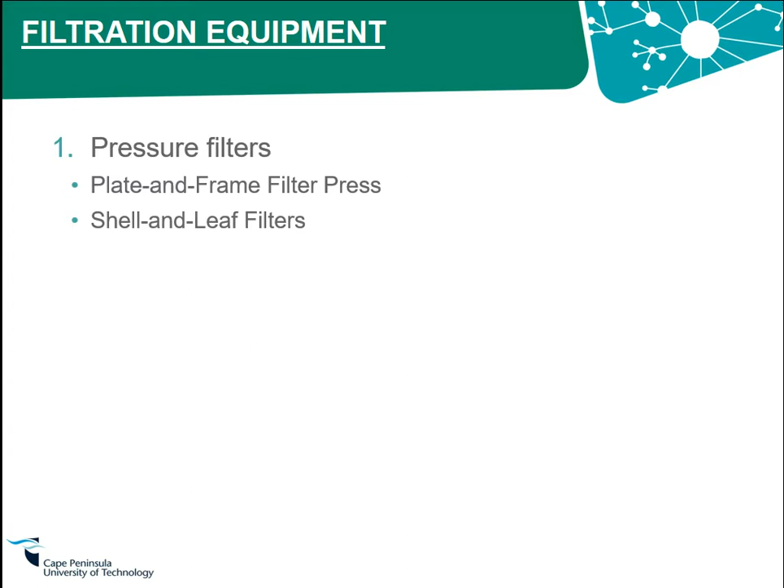First in the list we find what we call pressure filters. Here we've got two commonly used filters, which are the plate and frame filter press and the shell and leaf filters. We also have the vacuum filters, which consists of the rotary drum filter and the rotary vacuum disc filters. We're going to try to look at each of these methods and how they work.

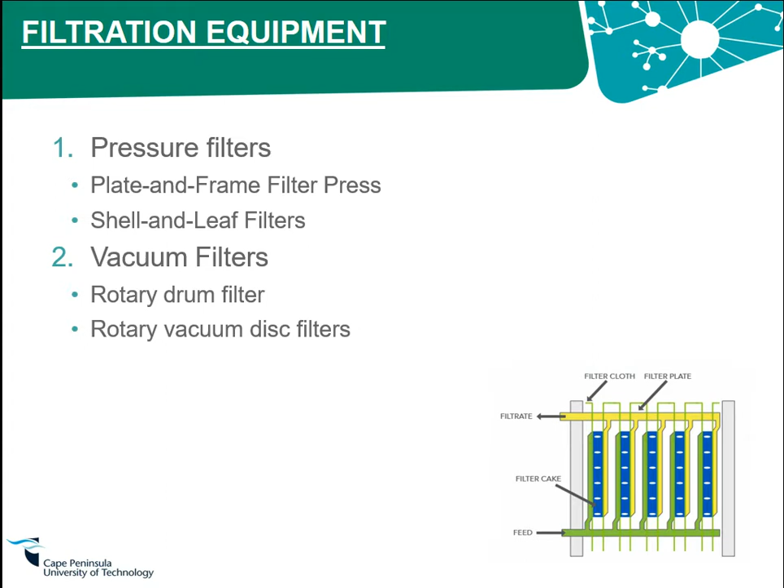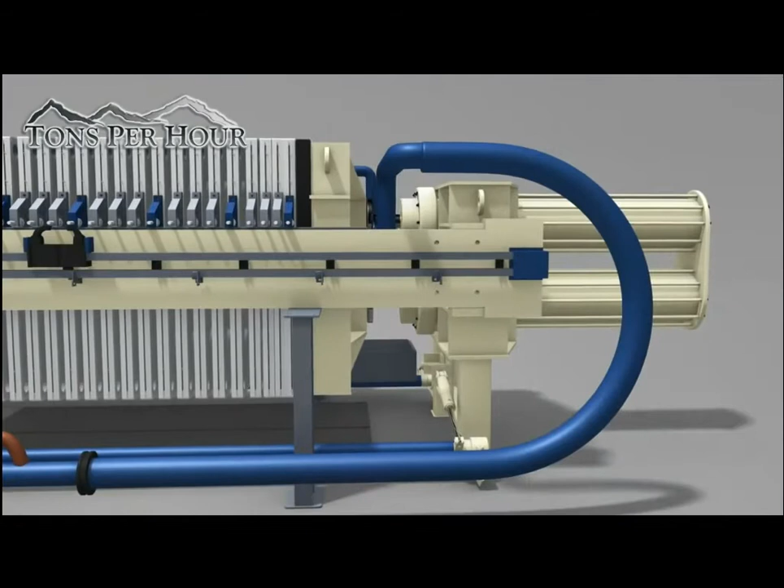So first of all, we are going to look at the pressure filters. If you look at this video, it's large equipment, as I've explained in the initial video, these are concerned with large scale processing. And here we are looking at the pressure.

There are plates that are closed and held tight into two large hydraulic pistons, and then there is air that circulates in these plate filters, and the slurry is fed into the chamber.

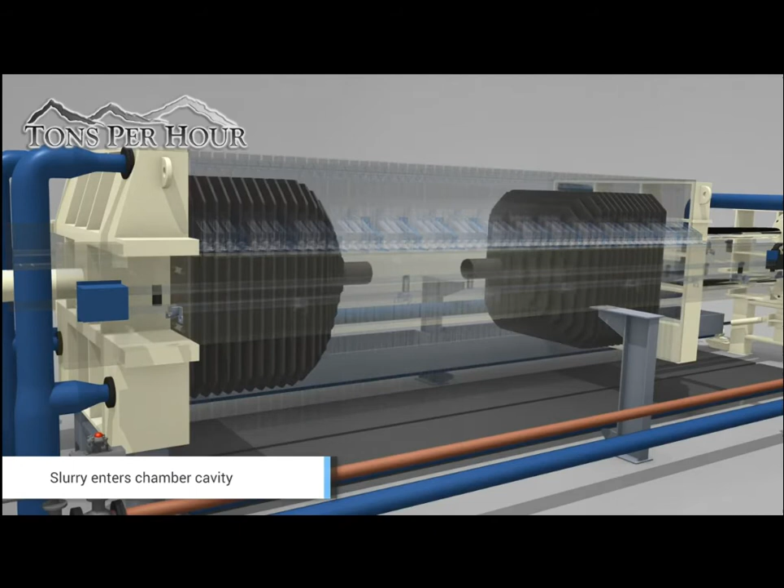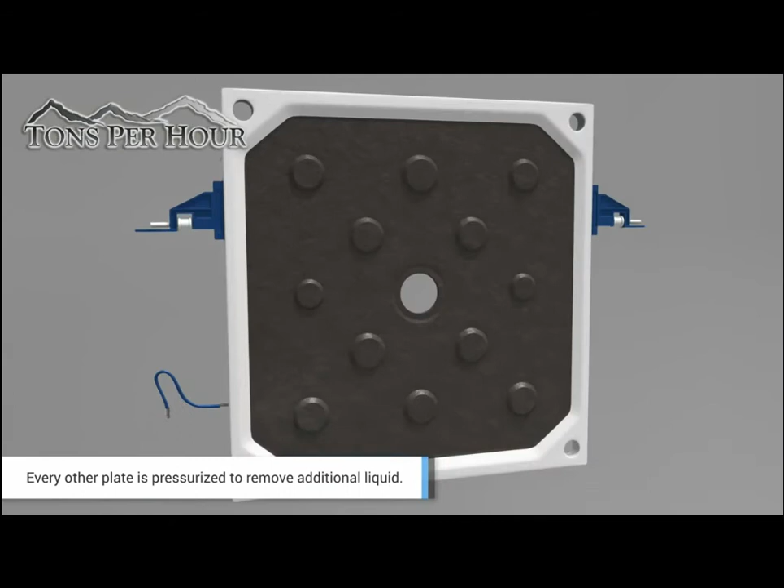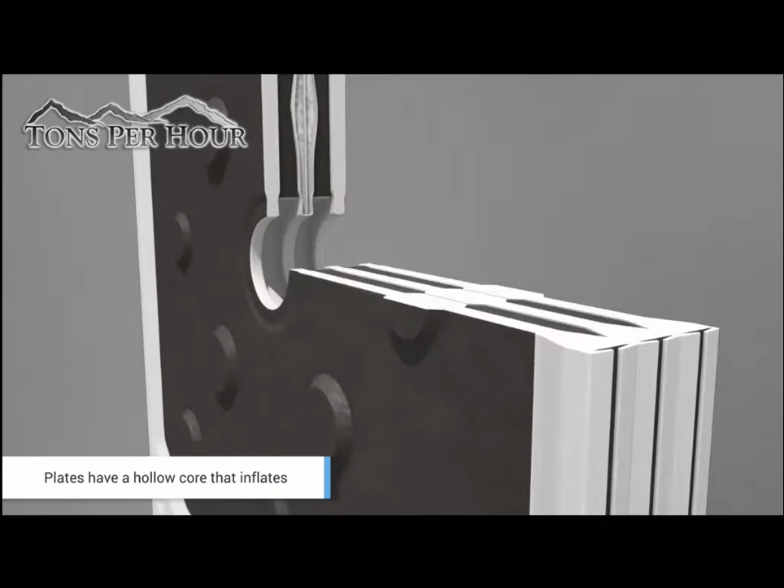Every other plate is pressurized to remove additional liquid. So these are the plates that separate your liquid material from the solid material, and then the additional liquid comes out in this stream.

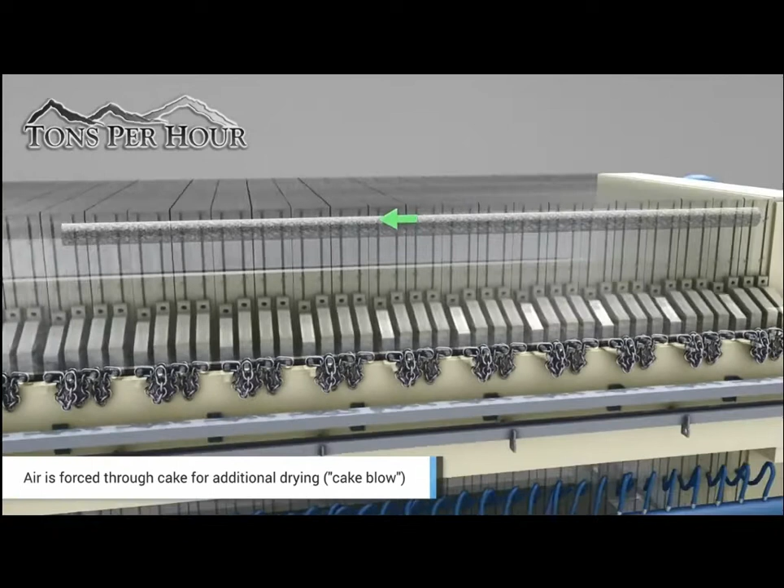We also force air in order to dry the cake, thus removing additional liquid. So in this case, we can then pump in air to push it out. Compressed air can also be used to remove the slurry.

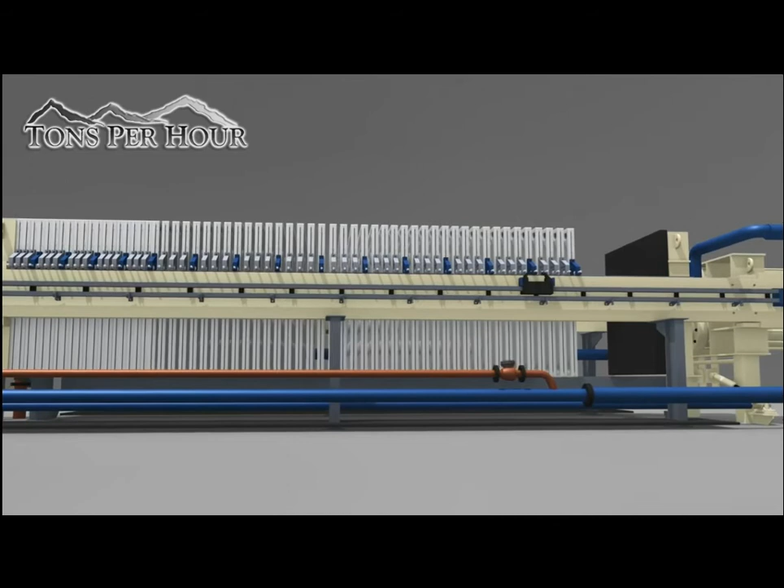Once the process is done, the hydraulic pistons release the pressure, and the plate and what you call the cake falls down into a layer. These plates are held by a chain, so they do not get removed. Only the cake falls down into another stream where it is collected by means of a conveyor belt.

So this is basically how plate and frame filters work. When these filters are discharged, the press is dismantled and the cake is removed, ready to begin another cycle.

There are three different plates: the filter plate, the frame, and the wash plate. The filter press has relatively low capital cost, high flexibility for different foods, and it is reliable and easily maintained.

The pressure filters have low capital cost; you won't spend a lot of money using these types of filters. They're highly flexible for different food products, so you can use juices, you can use umqombothi to filter, to separate the sorghum, and then obtain a clear liquid.

This is also reliable and easily maintained. Just remove the plates, wash them, and put them in again for another cycle. This is widely used for the production of apple juice.

As I've explained, apple juice needs to be clarified if you want a clear apple juice. The downside or disadvantage of these types of presses is that they are highly time consuming and highly labor intensive, taking time for cleaning and also for labor.

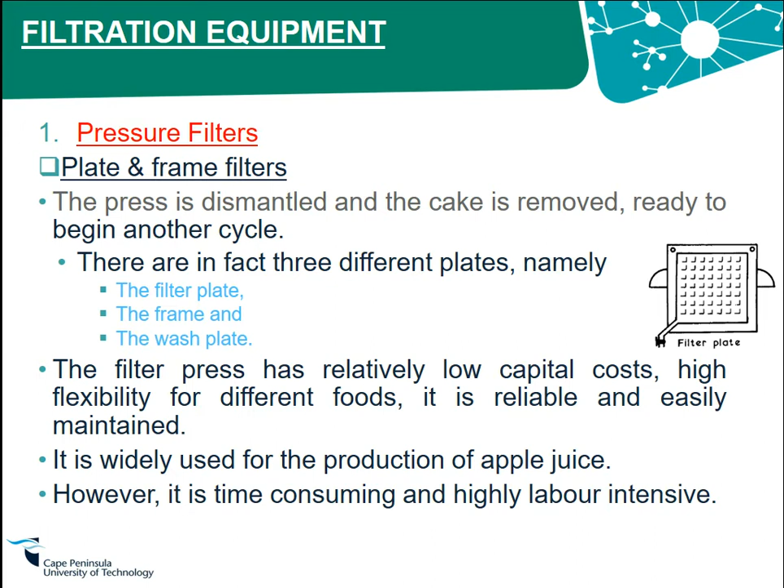These are the plates that form it. First we have the frame, which basically does not have anything, and then we have the filter plate which has grooves or meshes. The filter plate is almost similar to the wash plate.

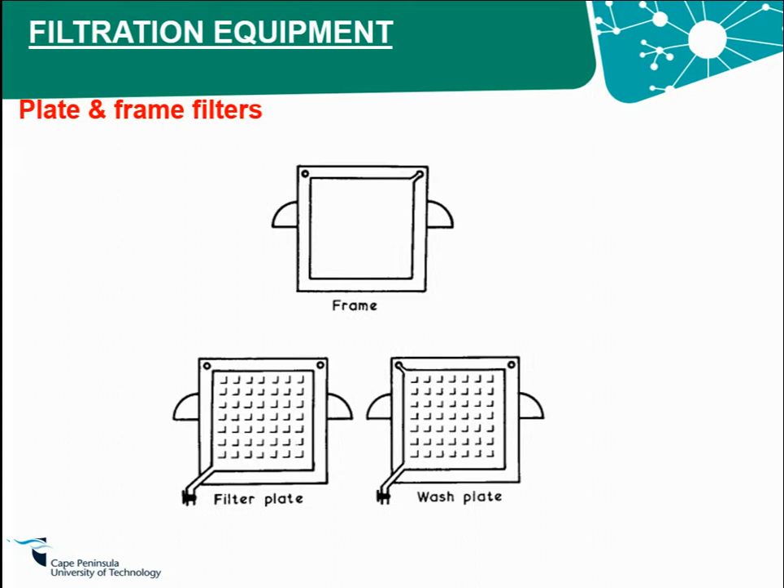Here's another diagram just to illustrate this process. We've got a filter cloth, which is this part, and then your feed comes in here. Once the feed comes in, it's pressed against this filter cloth, and then the liquid comes out here, and the filtrate comes into this area.

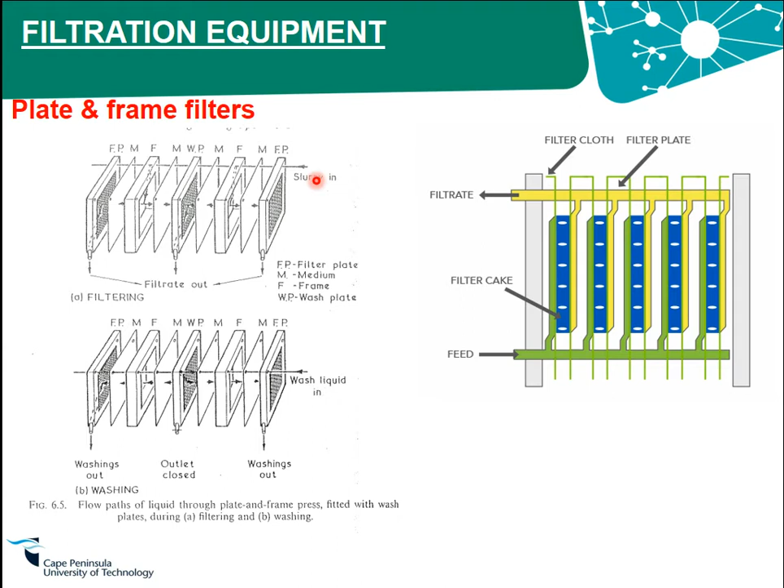If you look at the blue part, this will be your filter cake, made from the insoluble material. So if you look at this area, this is your filter plate that can be used. Basically this is the same thing, just shown from a different point of view, where we also have the wash liquid and the slurry. Importantly, you must be able to label or identify these components.

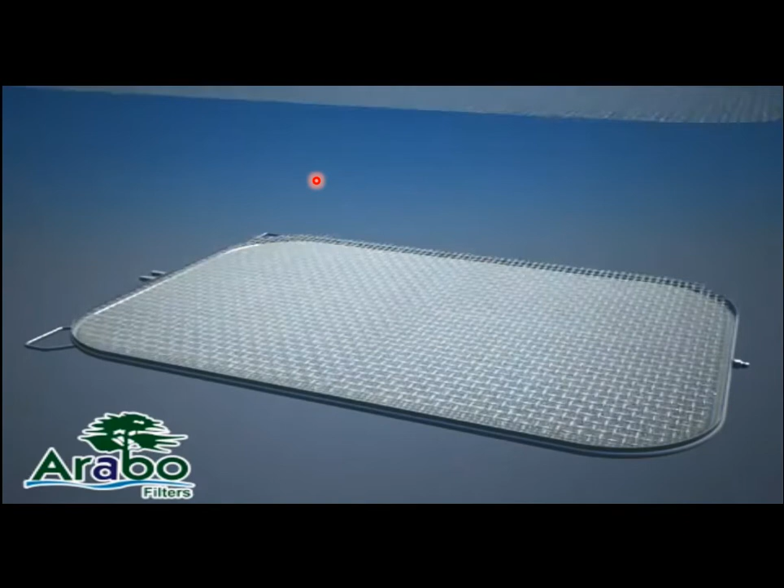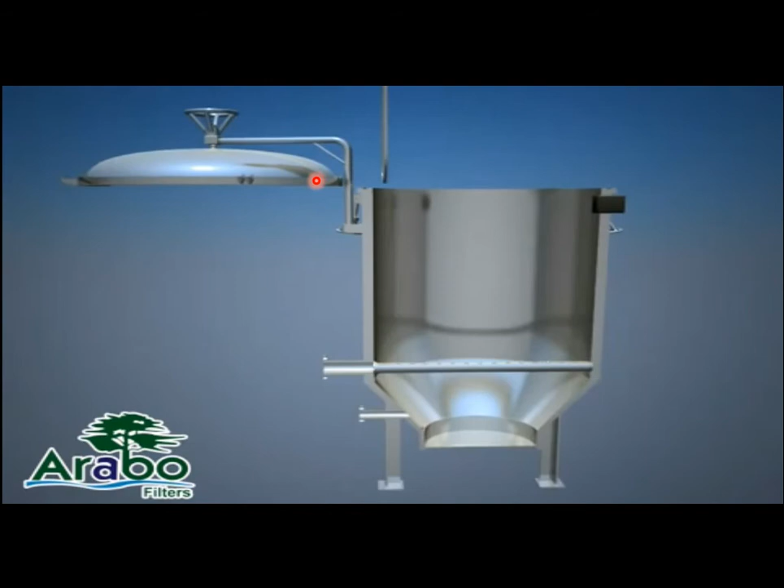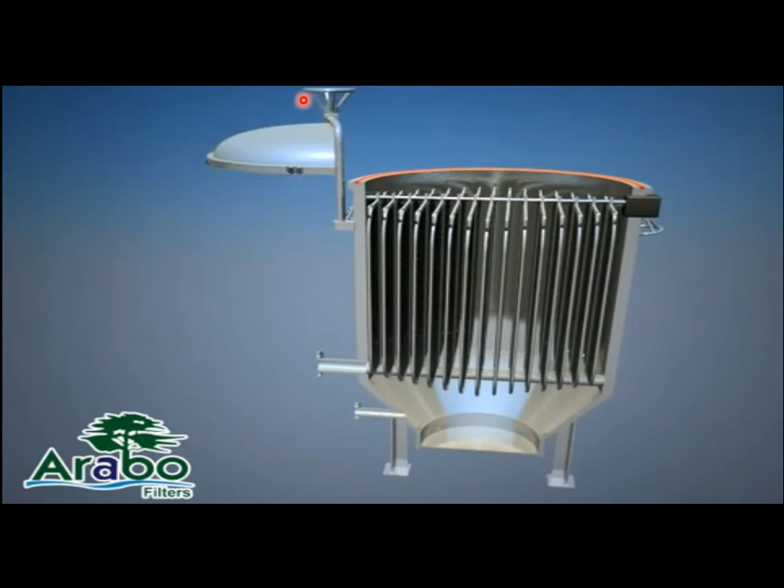Then the next mechanism that we find is the shell and leaf plates. These plates have got filters with meshes or grooves, and these grooves are constructed highly. These plates or leaves can be placed vertically into this chamber. Various leaves or discs are placed into the chamber, and then this chamber will be closed. And this is how it's closed.

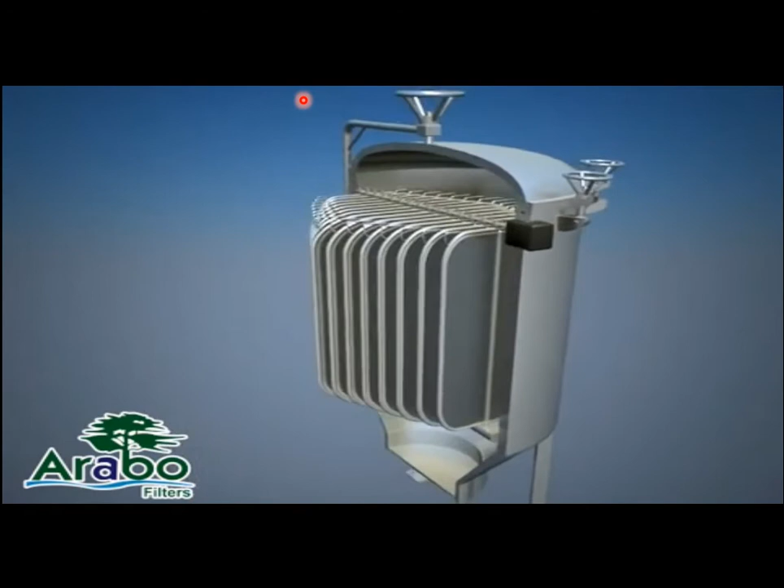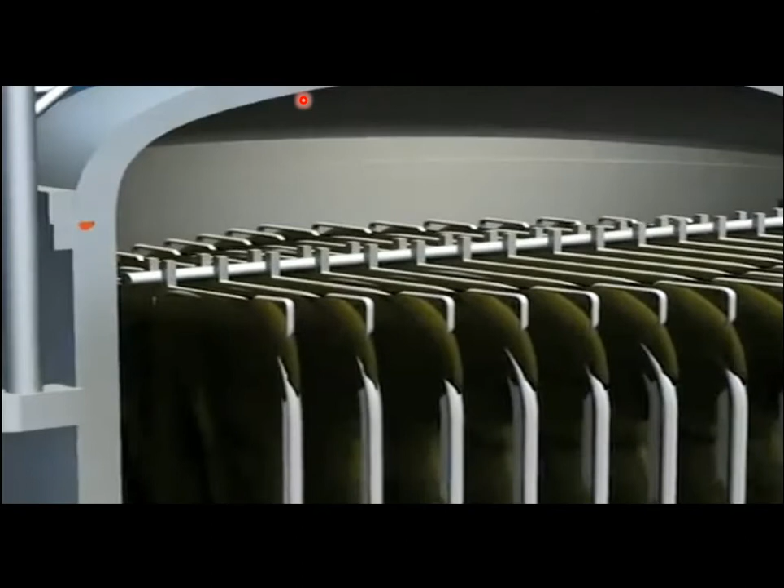In some designs, these leaves can also be rotating at 1 to 2 revolutions per minute to improve the uniformity of cake buildup. Your feed slurry is pressured in here, and then it goes into these leaves. These leaves, under pressure, separate the liquid material, which is your filtrate. It comes out on the other side, then the cake builds up on these leaves. When the filtration is complete, the cake is blown or washed from the leaves, so it goes down here. Then this is the cake that is decanted.

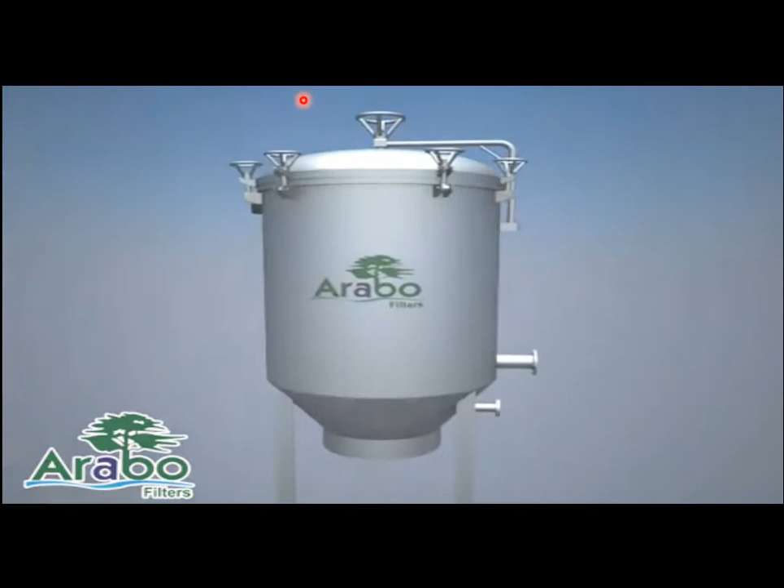This technique is very effective and has a higher capital cost than plate filters, and this is best suited for routine filtration of liquors that have similar characteristics.

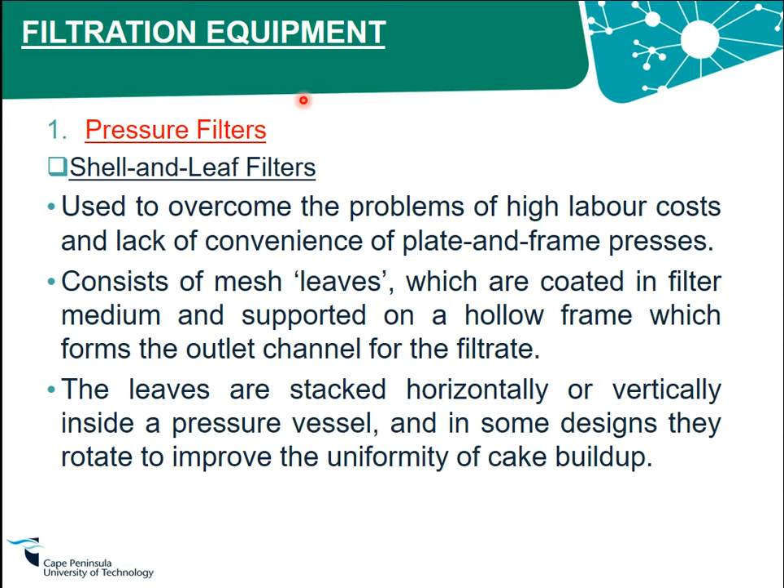So why are we using these shell and leaf filters? This is used to overcome the problems of high labor cost and lack of convenience offered by the plate and frame filters. This consists of mesh leaves which are coated in filter medium, and they are supported on a hollow frame which forms the outlet channel for the filtrate. These leaves are stacked horizontally or vertically inside the pressure vessel, and in some designs they rotate to improve the uniformity of cake buildup. This is basically the old generation shell and leaf filters.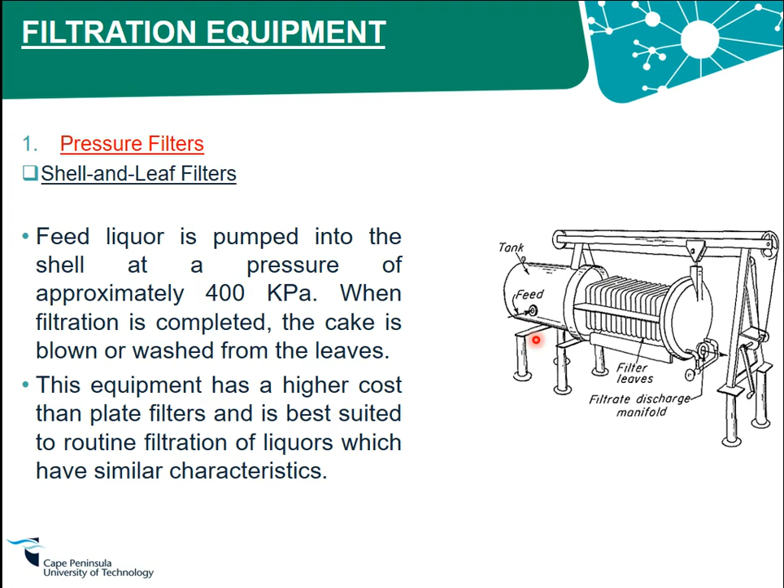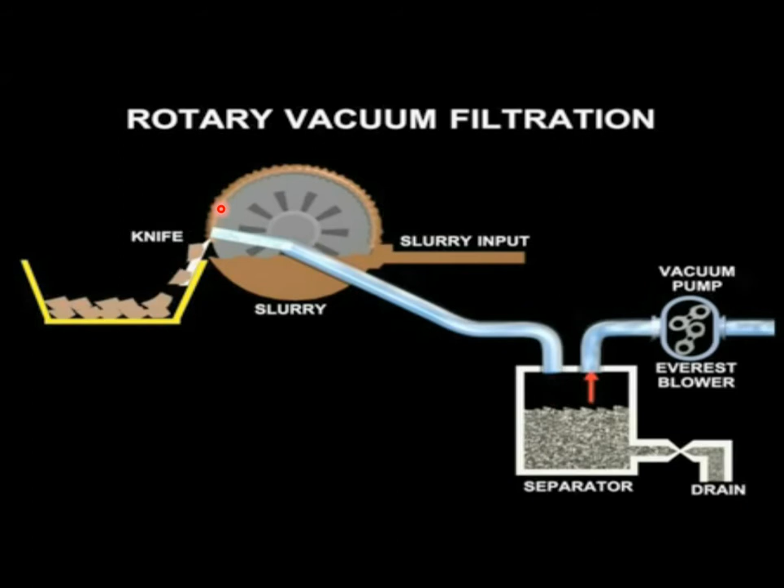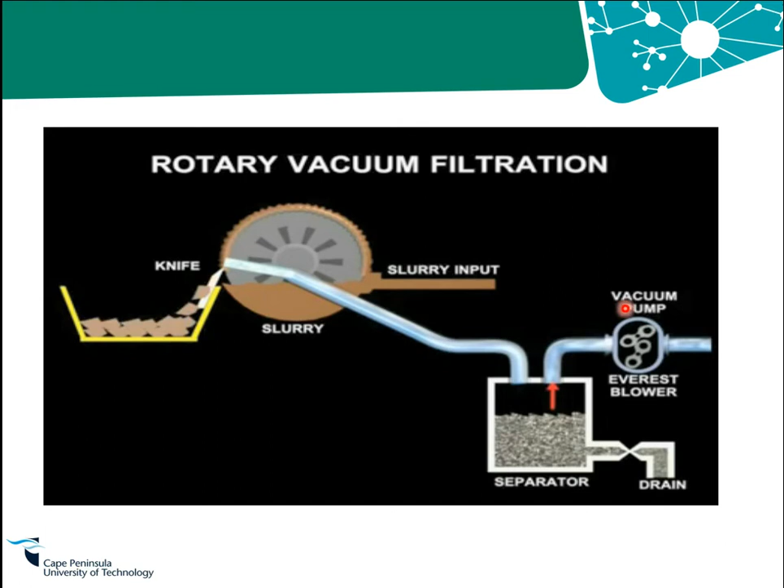The next one we found is rotary filtration. Your slurry input comes in here into this place, and as this rotates, the slurry is sucked by vacuum, and the cake stays in here, then there's a knife to remove your cake. Then the slurry comes over this place. Then you've got a pump. That is, as I've said, vacuum filtration utilizes a pump.

And how this looks like on a diagram. So you can also have the slurry from a different place or from a different angle. Then there's a wash liquid, then there's a scraper or roller, so which takes off your cake, right? So this is the same diagram over here.

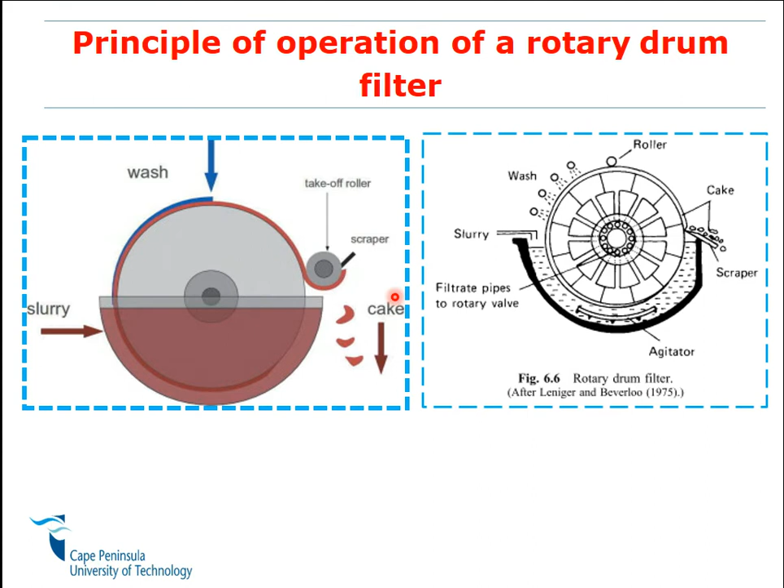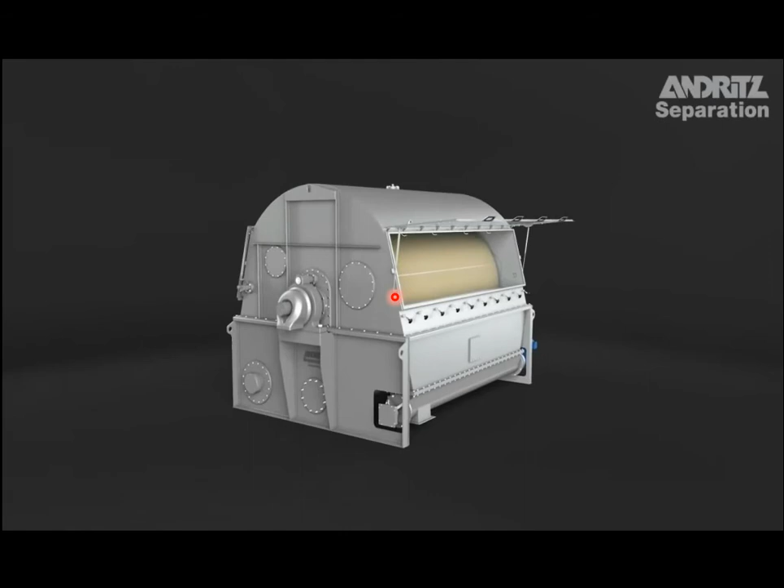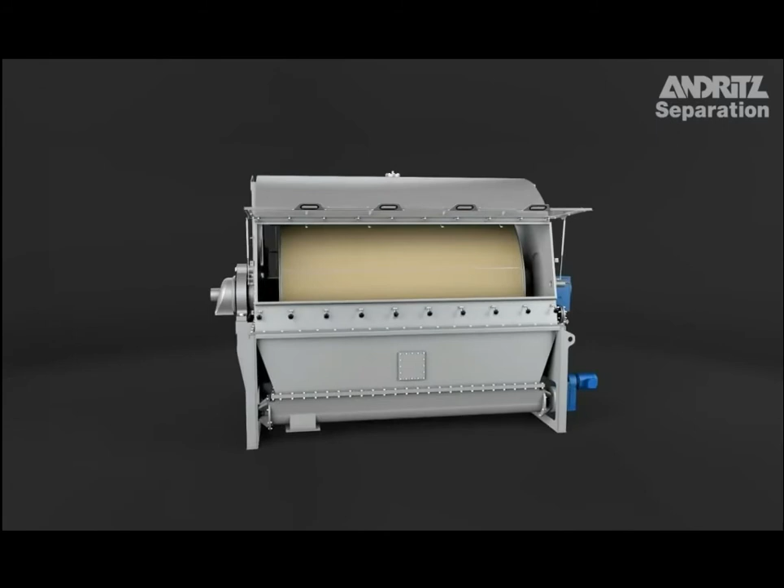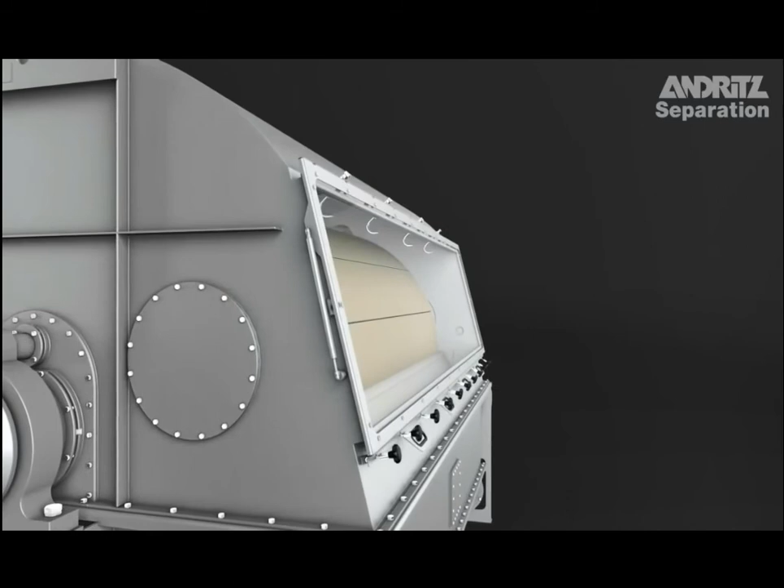So we look now at the rotary drum filters. The nice thing about this type of equipment is that you can have a glass where you can see how the drum filter works, so you can see the operation in motion. This drum rotates, we can easily observe it, and it's easy for you to conduct your maintenance on this drum.

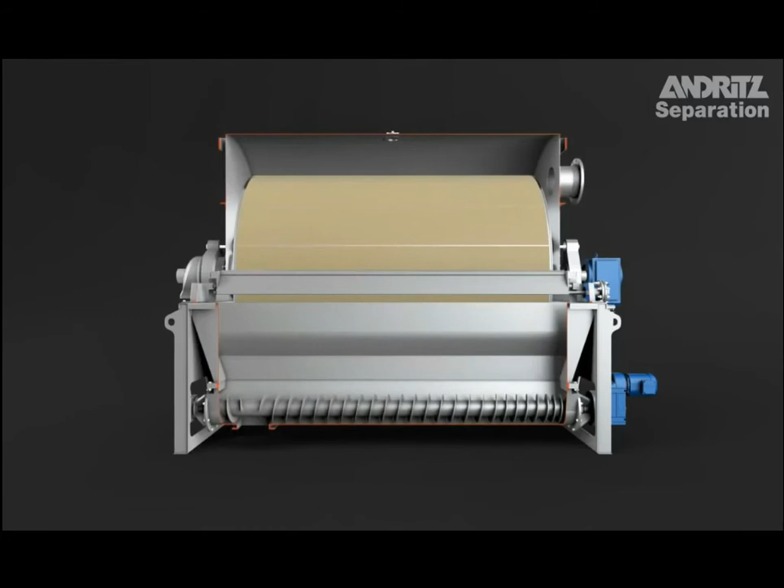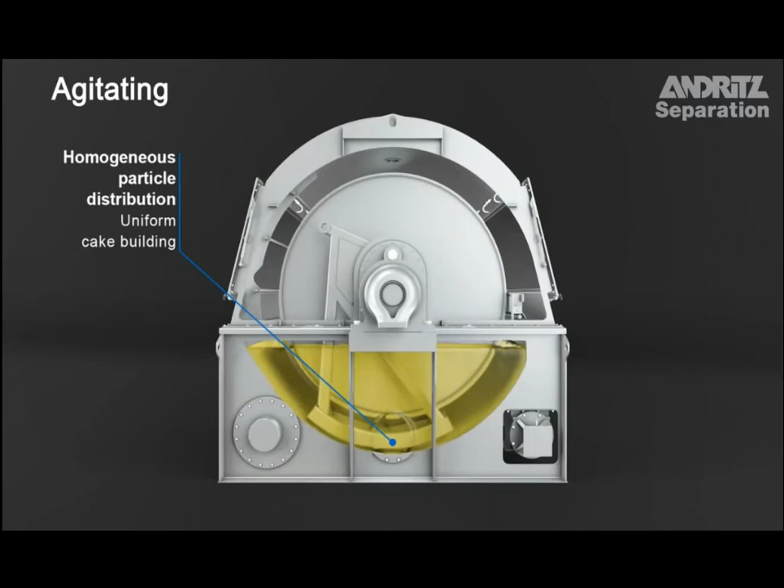You can feed in the slurry from the bottom, and under vacuum this slurry is obtained or sucked in, and then there's agitation, so particle distribution results in uniform cake buildup. Then you can also use separation in washing. During washing, your product comes out here, and you can also use these to wash the cake. The cake is washed on this side, so the filtrate is now separated into different streams for easier handling. You can also then dewater.

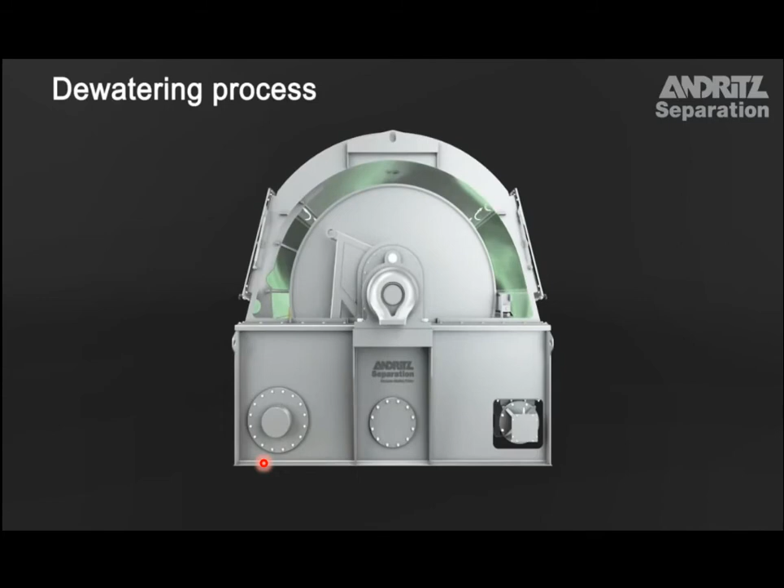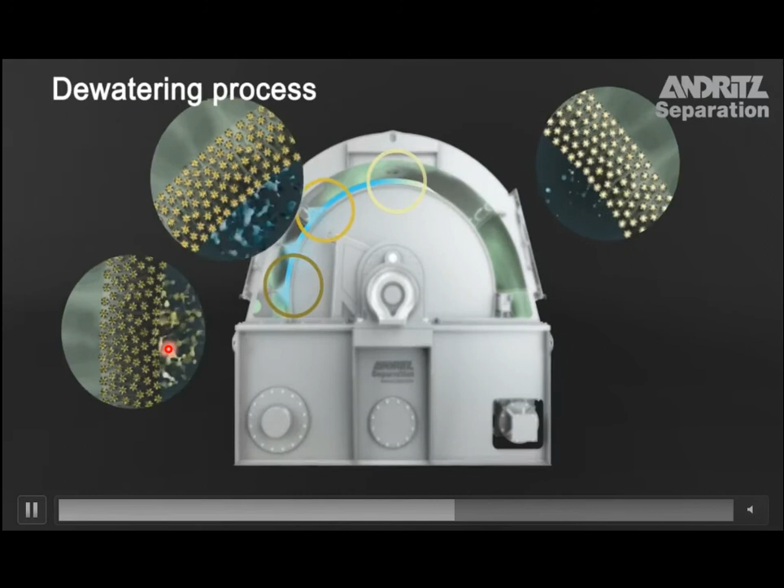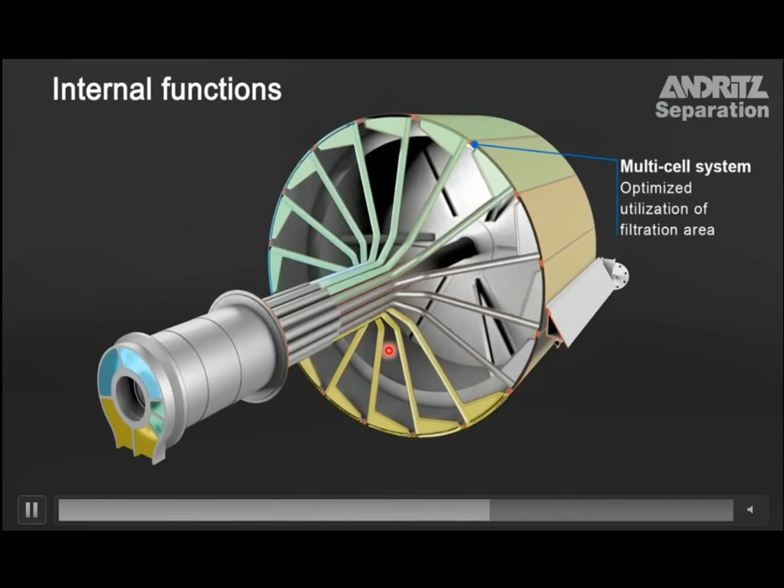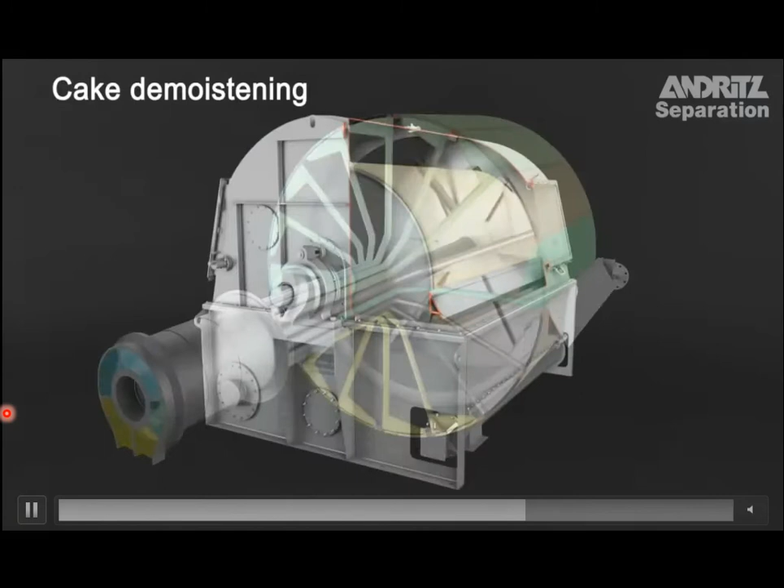From a macromolecular point of view, as you put in water, then there's separation of different components at different levels. So you can see dewatering the mother liquor, and you can also dewater the wash liquor. This is how it opens. So when it goes inside the material, the filtrate gets sucked in over here, and then this is how the cake is removed. On the other side, there is a scraper that removes the cake, or discharges your cake.

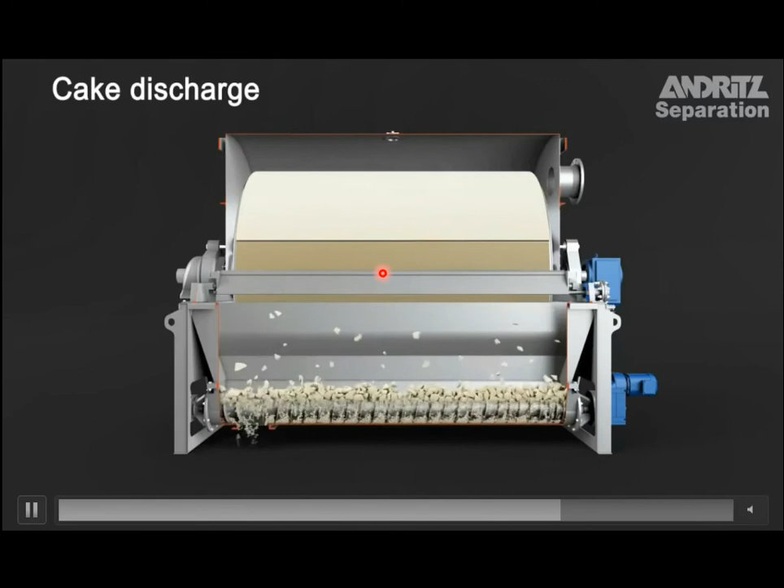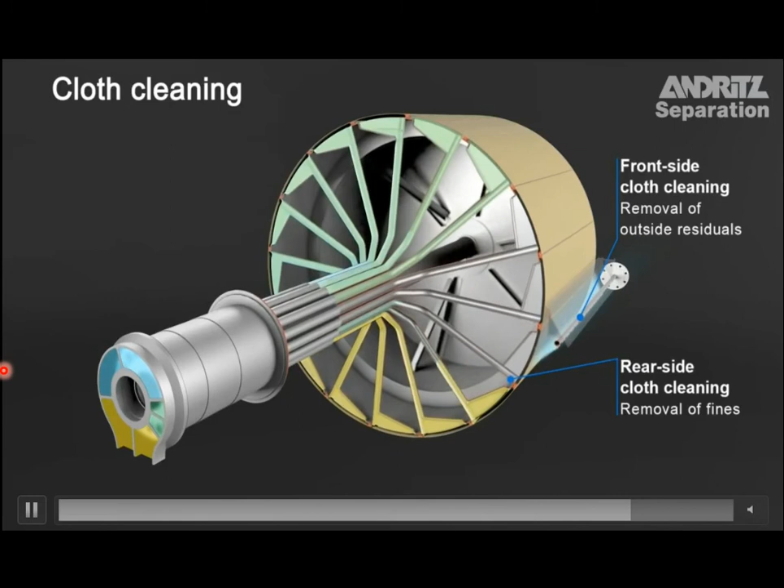You can also clean the cloth, which serves as your filter paper or filter medium. This cloth is cleaned by a continuous stream of water, and this is easier to use.

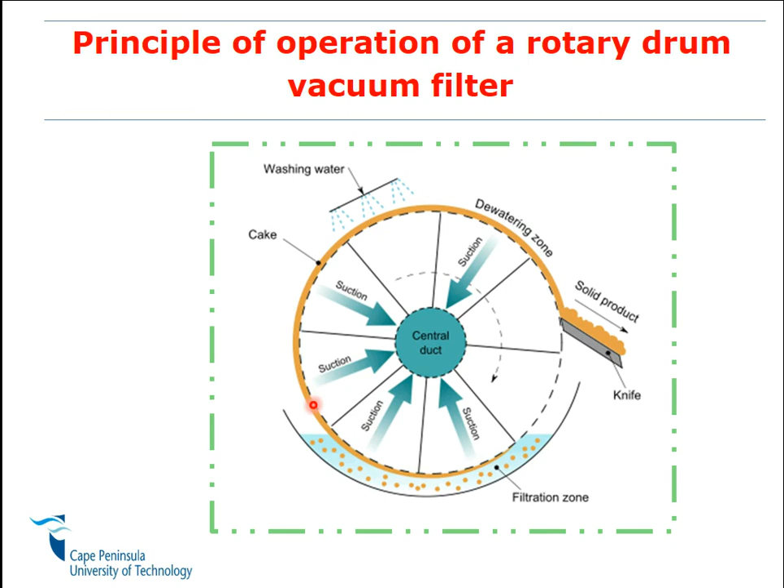Now that we have seen the applications, where do we use these techniques? We use this in sugar refining and refining of edible oils. When refining sugar, the juice produced by extraction from sugar cane or sugar beet contains insoluble impurities that we don't want, and we would like to remove them. Therefore, we need to use filter membranes in order to remove these materials.

So how does this happen? We treat the juice with lime to form a flocculent precipitate which settles at the bottom of the vessel. The supernatant liquid is then filtered to produce a clear juice for further processing. When refining sugar, we use plate and frame presses, and rotary drum vacuum filters can also be used.

In the refining of edible oils, after extraction or expression, crude oil may be filtered to remove insoluble impurities such as fragments of seeds, nuts, and cell tissue. Remember, in our practical for extraction of the oil, we used the principle of centrifugation to purify our oil, and the following week we saw that gravity separation can also take place. If you work on a small scale, you can also use plate and frame filters for smaller operations. So it's another way of separating these components.

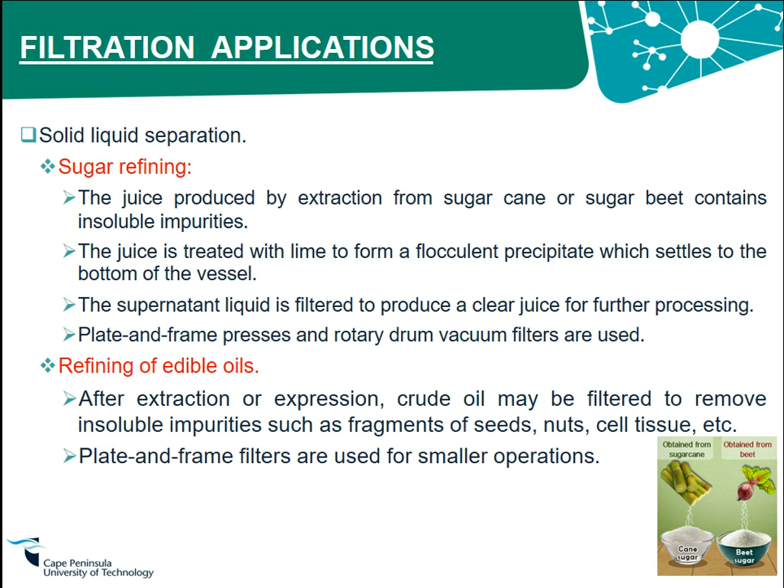Perhaps one of the most important clarification filtrations we have here in our department is for beer production. During beer maturation, a deposit of yeast forms on the bottom of the maturation tank. This yeast, if not removed, will give you a beer that is hazy or cloudy. So beer is recovered from this by filtration using plate and frame filters.

This beer is clarified by treatment with isinglass finings, centrifugation, or filtration. If filtration is used, the beer is first chilled, then filtered through a plate and frame filter, horizontal plate, or edge filters. So what you need to understand, looking at this picture, is that this is beer that is unfiltered, and this is filtered beer.

A similar thing happens with apple juice. If it's unfiltered, it is hazy or cloudy. In order to remove the cloudiness, we can use plate and frame pressure filters to clarify the beer or juice. That process we call clarification by filtration.

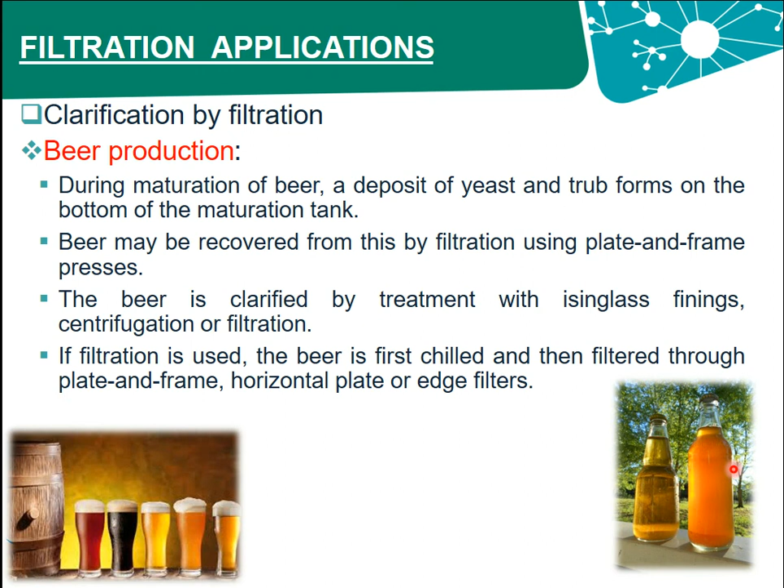The same principle applies to wine. Wine is filtered at different stages of production: after racking, after decolorizing, and finally just before bottling. What do we use in filtering wine? We use plate and frame presses, shell and leaf filters, or pre-coated rotary drum vacuum filters. Here you can see wine that has not been filtered, and here wine that has been filtered. Filter media mainly used for wine are sheets made up of cellulose incorporating a filter aid material, mainly diatomaceous earth, bound on the cellulose sheets with bitumen.

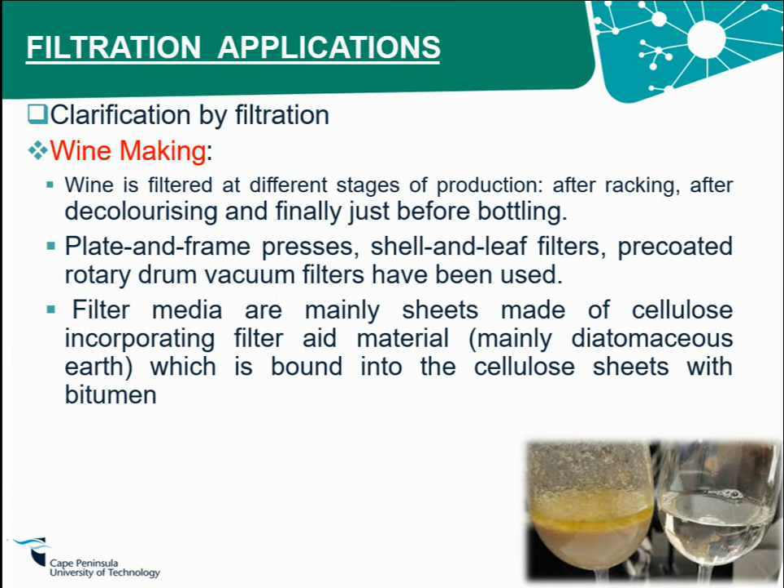The last part we're going to look at is the removal of microorganisms, termed microfiltration - the removal of yeast and bacteria from liquids, as in the case of beer. The fibers hold the negatively charged organisms electrostatically, using the charge of these microorganisms compared to the charge of your filter medium. The common products where we use this are wine, beer, fruit juice and yeast extract.

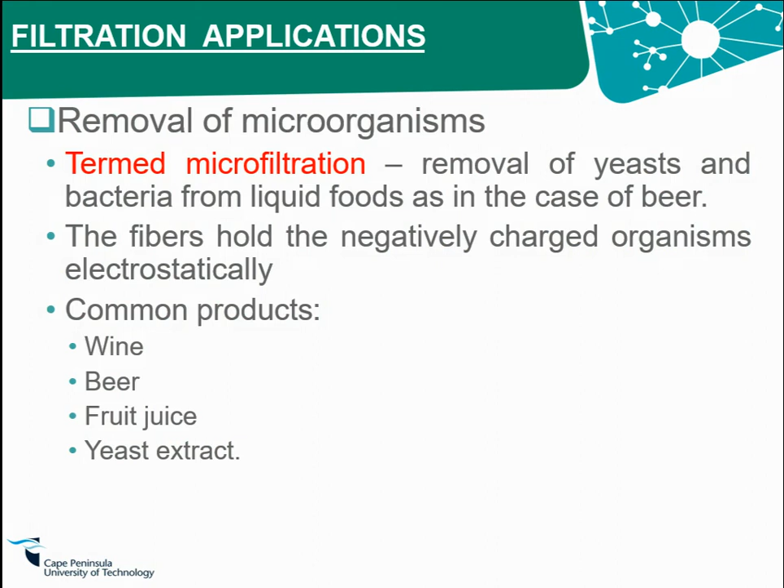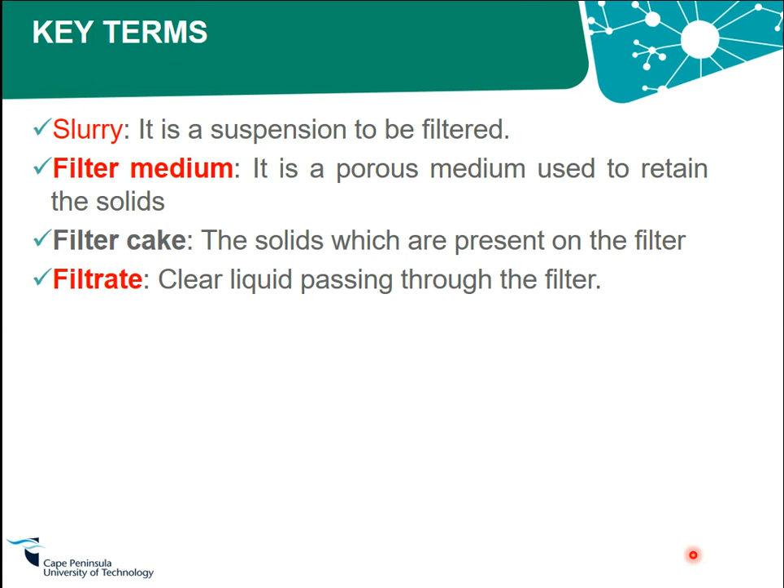So what is it that you need to know? For filtration, the terms you need to know are terms like slurry, filter medium, filter cake, and filtrate. And that's it for this section.